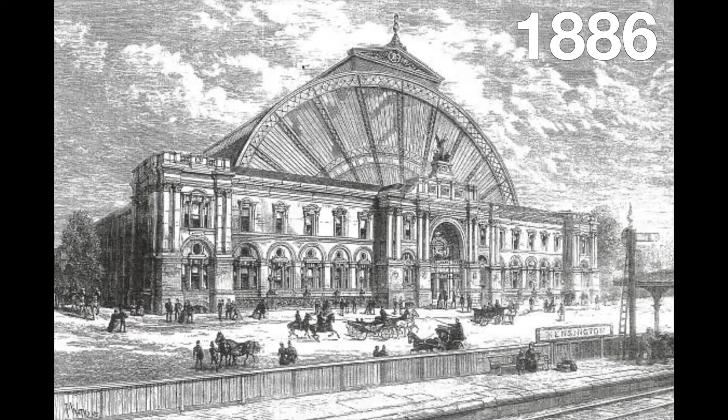We wanted to come up with some words which would really embrace what the master plan was going to be about. The first one was celebrate, and the idea of celebrating is fairly obvious. We wanted to celebrate the wonderful history and also the pedigree of those buildings.

The second word is also quite clear, which is restore. A lot of things have happened over those years. For example, this staircase, which pops in through the Grade 2 star listed facade, was actually put in for the Queen Mother when she came to the Horse of the Year Show. She didn't want to mix with the hoi polloi, so they just cut through an amazing facade and put a staircase in. All of this is coming off, so we're very much restoring the heritage fabric.

The third word here is really where we got involved, and that is the word enhance. Enhance doesn't mean we're going to put gold taps in the bathroom. Enhance is, how do you enhance the experience? How do you encourage people to come to Olympia? Why would they come to Olympia?

And that takes us back to this photograph. When this photograph was taken, and when the Grand Hall was first constructed, in the company registration, in great Victorian words, it was to educate the masses. What happened over time is we have a kilometre of perimeter, but unless you had a ticket to come into the halls, then effectively, why would you come to Olympia? This education of the masses is why it's called a people's palace.

It felt to us, how do we allow people in? So actually they can say on a Sunday afternoon, where should we go this afternoon? Let's go to Olympia. To do that, we need to enhance the offer. How can we bring more into the space? As I say, the exhibition was bold and inventive, and we wanted to ensure that any master plan going forward embraced that.

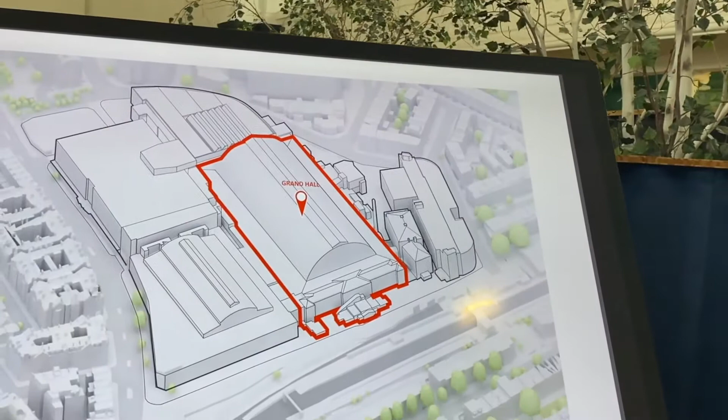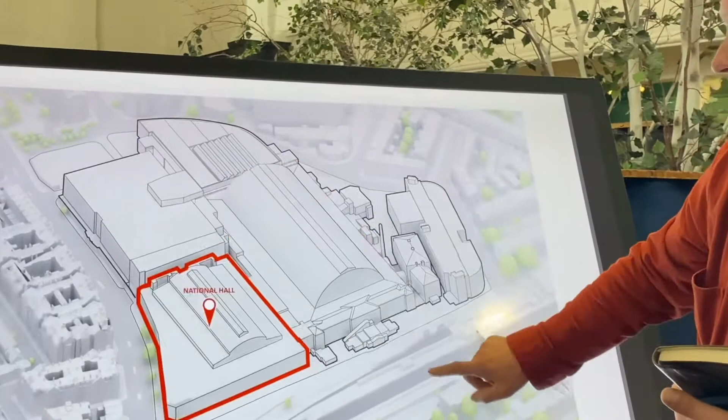Just to whip around the estate, so it's clear which bits we're talking about. The Grand Hall was the first building, the larger building you saw in that photograph, Grade 2 star. We then have the Grade 2 listed building, which is the National Hall.

In fact, this 7 metres across here was the active frontage, so that was an entrance into Pizza Express. If you didn't fancy a pizza, you weren't coming in either. Then we have the Central Hall, Grade 2 listed. We then have the G-Gate site, and actually that was the only empty site.

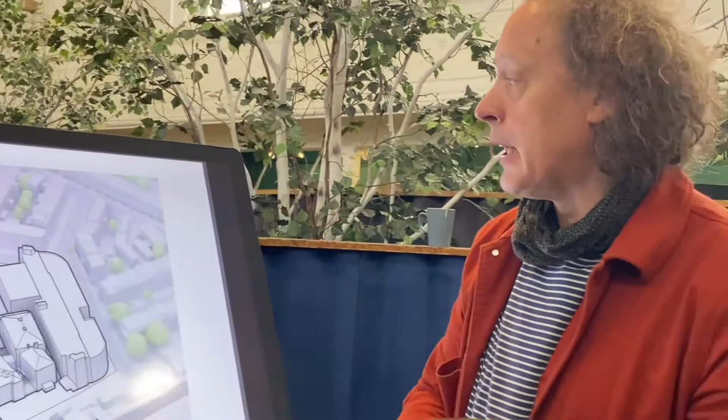When our client bought the site, and they bought the ongoing exhibition business, which is why it's so important to keep the exhibitions going. I guess you would look at this and think, actually, that's the opportunity. Everything else is kind of built upon. It's not quite where we were, but effectively that was the development opportunity on the G-Gate site, previously used for logistics.

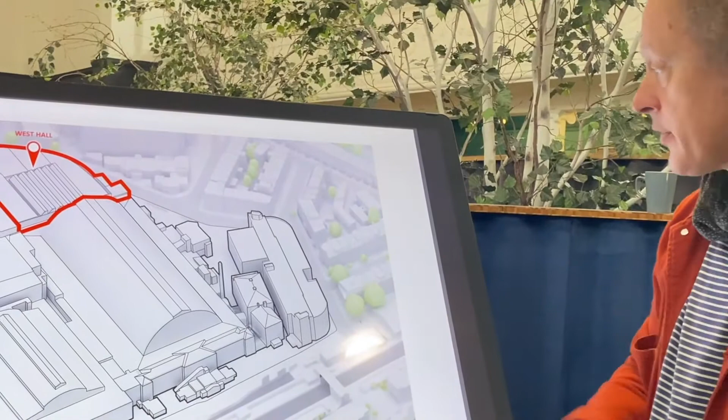We then have the West Hall, which was the original stable blocks for the building. The horses used to go in there, and then people used to come into the exhibitions. And actually, a wonderful piece of legacy during the Horse of the Year Show - that's where they go again. They all get stabled up in there.

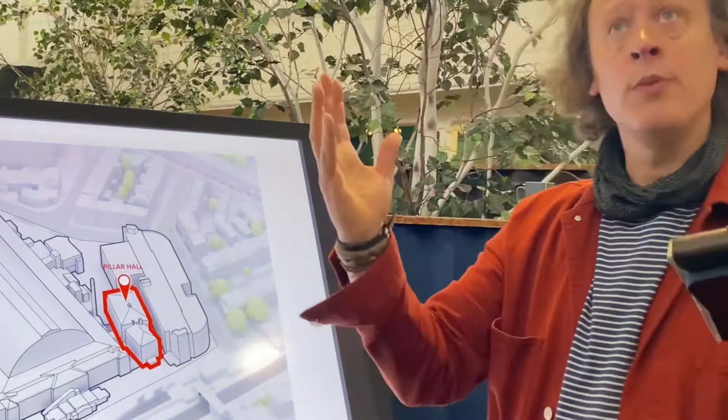We then have the Pillar Hall, again Grade 2 star, ante-room to the Grand Hall. That's what we're standing in this morning. And then we have the 1937 building, which is the old multi-storey car park building, now renamed Emberton House after Joseph Emberton, who was the original architect for both the MSCP building and also for the central building.

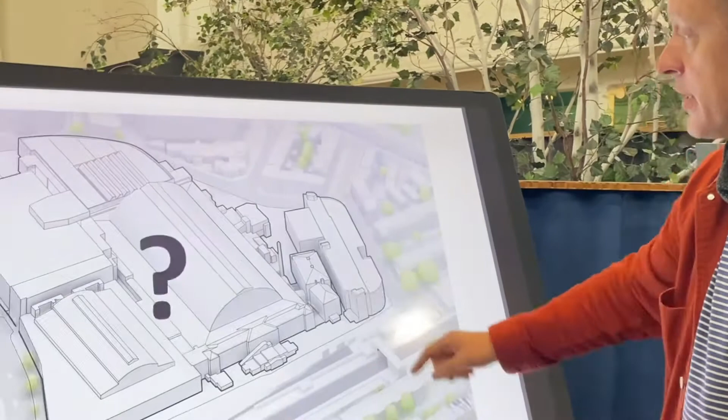So then we start thinking about the master plan vision. Our client was very kind, in as much as they said to us, what would you do? So rather than it being a very definitive brief, the brief was two things. The first one was, you have to keep the exhibition business live - whatever you do, we need to keep the exhibition going during the construction process. And the second one was, how do we optimize the site? How do we bring back that people's palace?

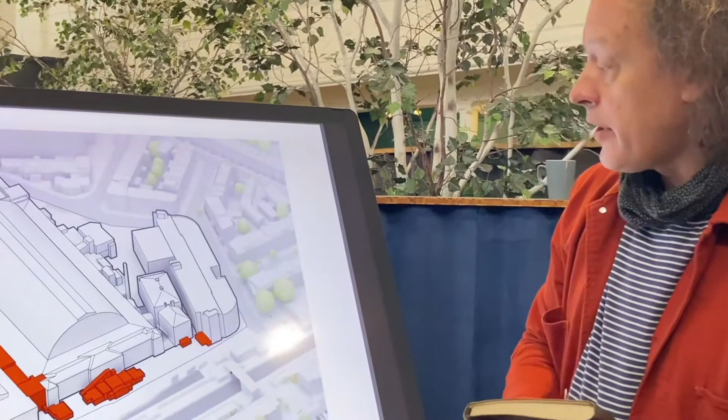How do we get people to come back to Olympia? The first thing we thought about was to sort out the logistics, sort out this linking together of all these things which have happened.

So there used to be a street through here. This used to be Hospital Avenue. You used to be able to walk through it. This is the entrance which we saw on the front of the building.

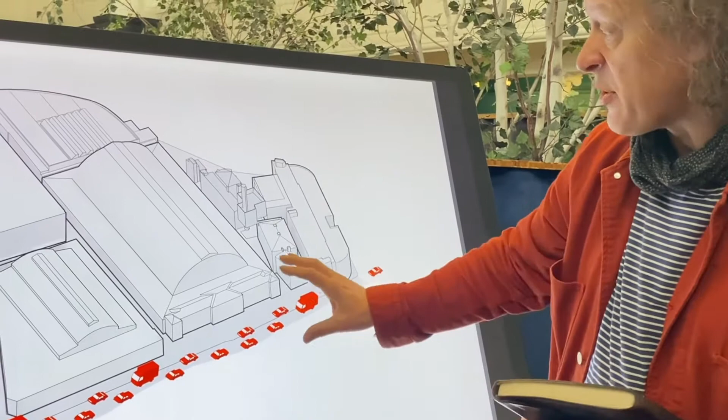Between the two studios, we quite clearly thought, let's get rid of all the freight happening along Olympia Way. If we move that into a better place, effectively inside the halls, creating this new logistics centre underneath the buildings, then effectively we've liberated the streets.

So we start high-fiving each other. We've now done it. We've unlocked Olympia. We've created this new porosity, this new permeability through the site.

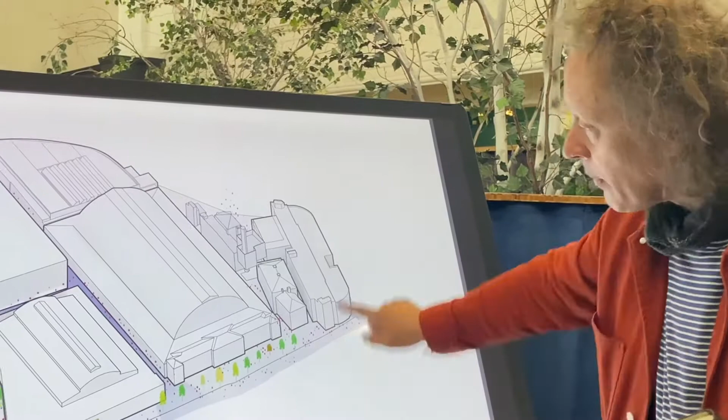Happy days. We then went to see the exhibition business and they said, love the idea, but what you've effectively done is given us 3 halls, where actually what we really need is that continuity. On some shows, they use all the halls linked together. But we still thought the idea was right.

So we came up with the idea that actually, we'll just lift it. We'll just lift everything up. That's what was there previously.

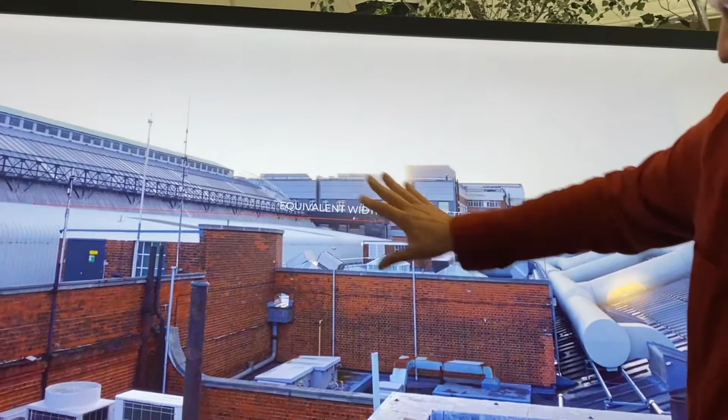When we go out today, you'll see that some of it's still recognizable, but a lot of this is now gone. Just to give this a scale, that's the equivalent size to Regent Street. That's 22 metres wide.

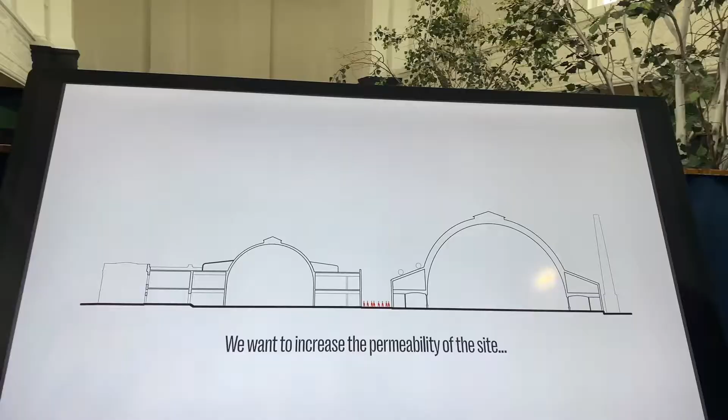So the idea being that actually if we can liberate this, we can bring the public realm up, then we can start to create a space. The idea is to create really the destination, to give permeability to Olympia, to basically allow the public in. And how do we do it?

The beauty was to create this level 2 platform that will give you completely new views to the halls, bring you really close to these amazing barrel vaulted glazed roofs. But obviously, because of the weather and all the conditions, we wanted to have it really comfortable.

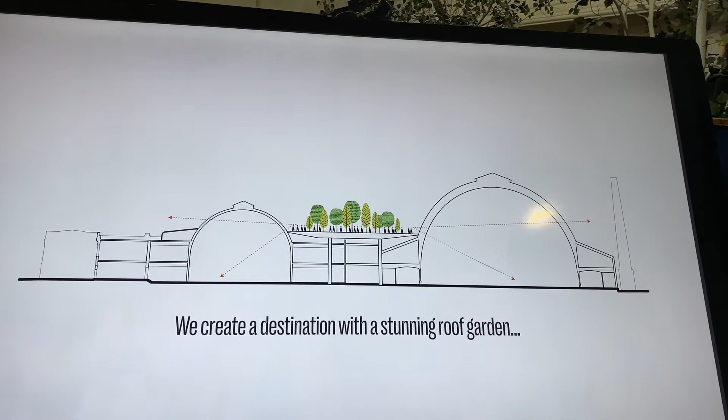So we created a green area with food and beverage. It will take you through. So it's a destination where people can meet, can have food, can have a drink at all hours. There are 2 lines of restaurants, food and beverage with a mezzanine.

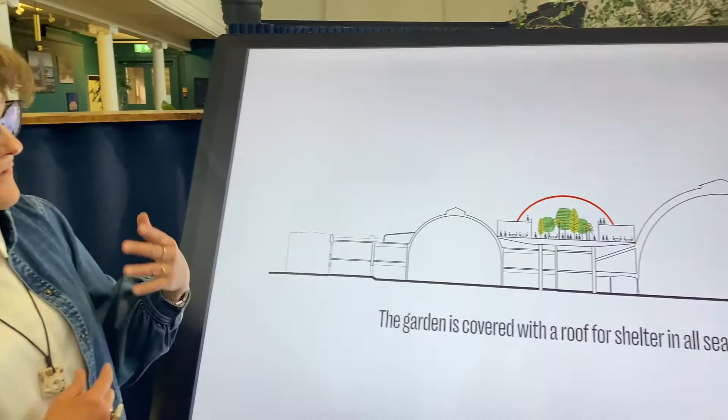And then we covered it with a vault, making a direct reference to the historical halls' roof. It is a vaulted arched glass roof as well. In discussion with the planners, we had to adjust the height, it had to dialogue, it couldn't be super important. We really liked calling it the third arch, this beautiful canopy on level 2.

Talking for the studio, the idea of placemaking and tactile material, it's the human centered vision that really matters. So we looked at every type of 3-dimensionality to give the depth.

So we kept the zigzag in the vault. We really looked into every detail and refinement for the handrails, for the pavers. Everything is really looked at in its detail, because it's how you experience the space.

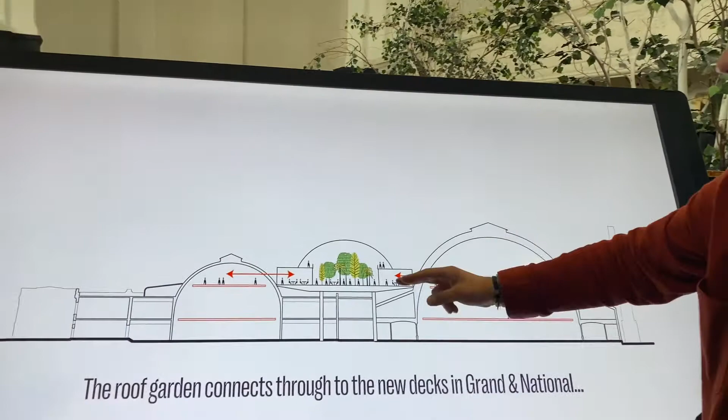And actually you may decide that you want to go to the Ideal Home exhibition that day. So you've come up here for a fantastic cup of coffee, but then your day continues into other events, the other purpose, the other reason to come to Olympia.

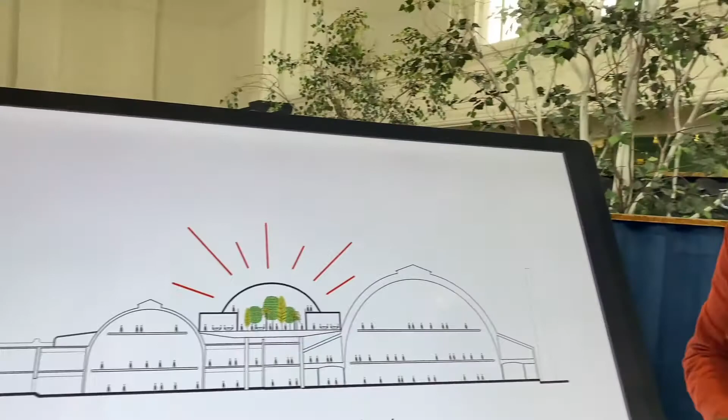And equally it's a place for the offices hovering on top, for the residents, for people who just want to enjoy staying outdoors - now there is a reason to go to Olympia. And then you might decide if you want to go to the exhibition, but it's a far broader audience.

The idea is how you bring people up two floors. Obviously, we need a very long escalator, but we wanted it to also be a stairway. So it was really interesting, the journey as a landscape project as well, how to make people walk up the stairs, with planters, with seating.

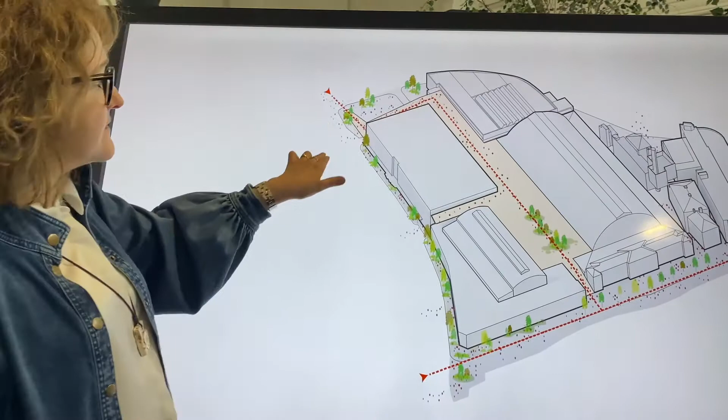So we are encouraging a massive amount of people to just come up, and then the journey continues under the central area, and comes down around to the theatre. That's the important thing, but you don't have to come in and then come back out again. It is a connected route, it gives you lots of options.

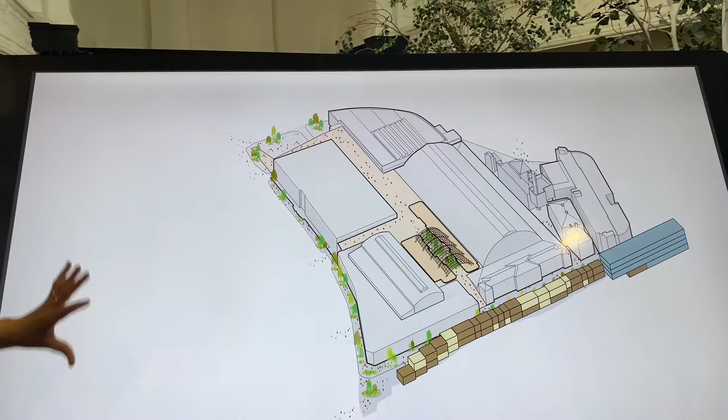Here is a food hall, but you have other facilities along here. So that's the new roof, but the public realm actually continues and links both sides. So it was a massive approach and improvement to the site, because it's a new realm. It's unlocked something which had previously been about just the ground plane.

Now what we're doing is elevating the ground plane, but also giving it purpose here. So once we've got people through, what are those functions? We just talked about the F&B spaces through here. We then looked at the cultural aspects of Olympia, which is a hugely important part of its history, and a very important part of its future.

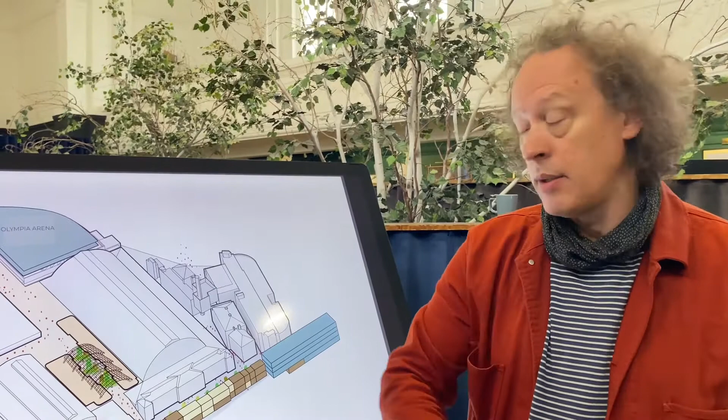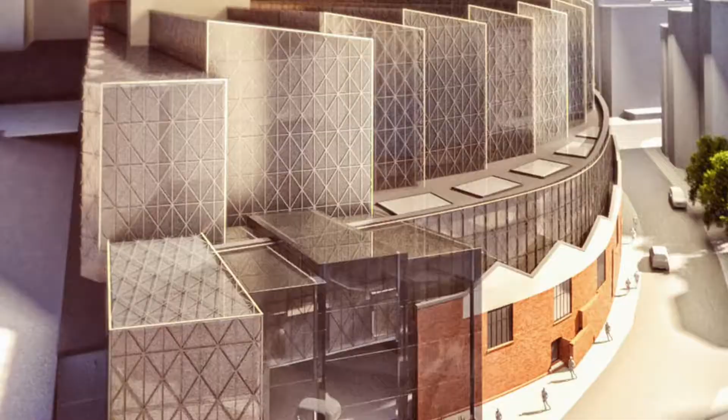So we're constructing two new venues. The first one is on the other side of that wall here, on top of the old West Hall, which is a new music venue. AEG are taking that at a capacity of 4,500 people.

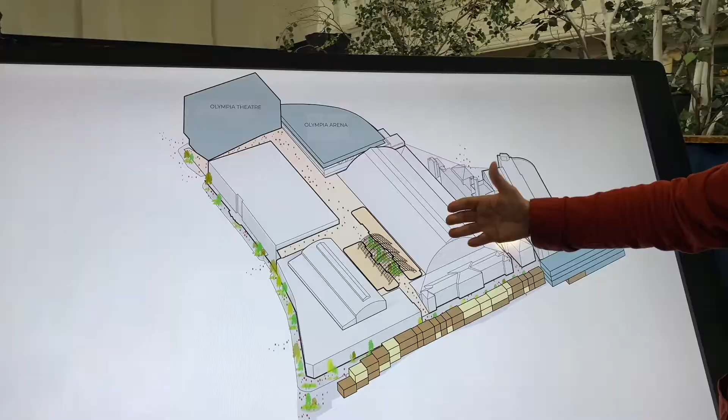Then over here, there's a new theatre, the Olympia Theatre, which Trafalgar Entertainment Group are taking. It's the largest purpose-built theatre since the National, so a fantastic aspect for the scheme. The idea being the entrances are up at this level, so you come through here and then arrive into the arena or into the theatre.

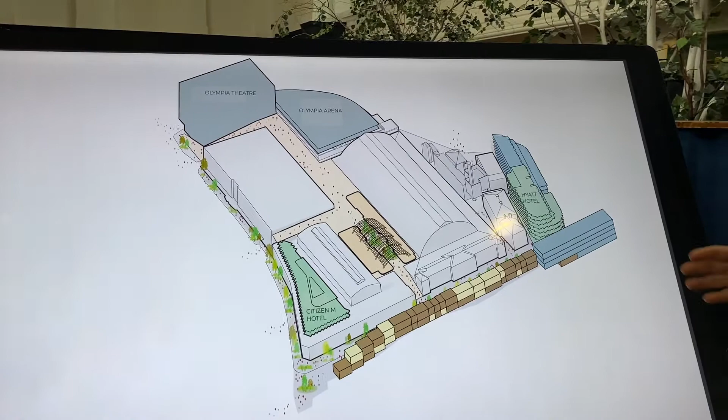We then have two new hotels. One thing which came through the consultation, both with local residents and with the exhibitors themselves, was the lack of hotels in the area. So we have two hotels.

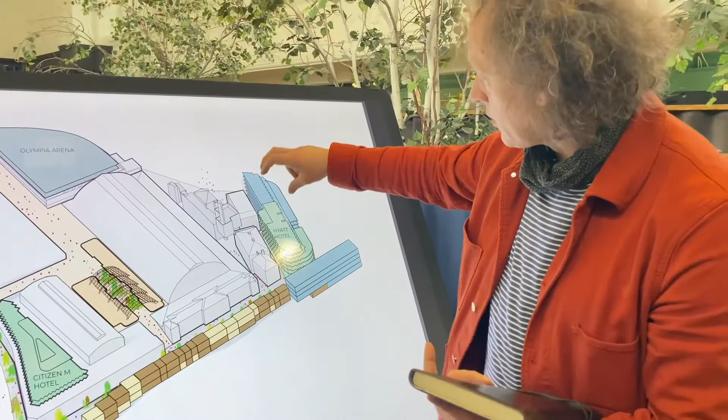We have a Citizen M hotel, an urban hotel going on top of the Grade 2 building on the National Hall. And then the old car park building is being repurposed for two uses: one for a 5-star hotel for Hyatt Regency, and also an education building for the performing arts going into the western portion.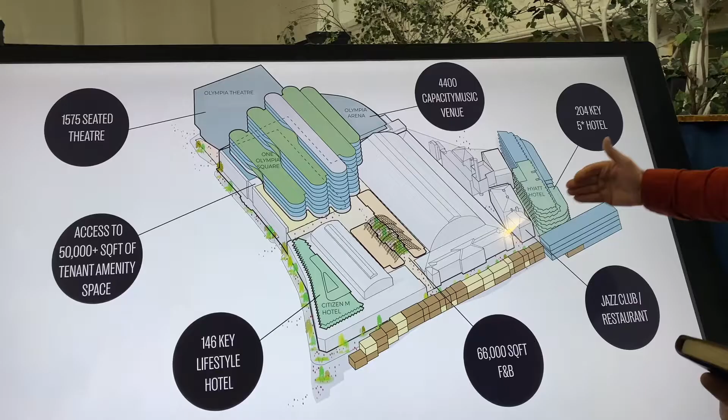And then to bring it all together, we have One Olympia Square, a 600,000 square foot commercial space. But that commercial space is very much looking at how it works with the overall Olympia district, very much looking at arts and innovation, and effectively creating this place. If you're working inside the commercial building, you have all these facilities absolutely on the doorstep.

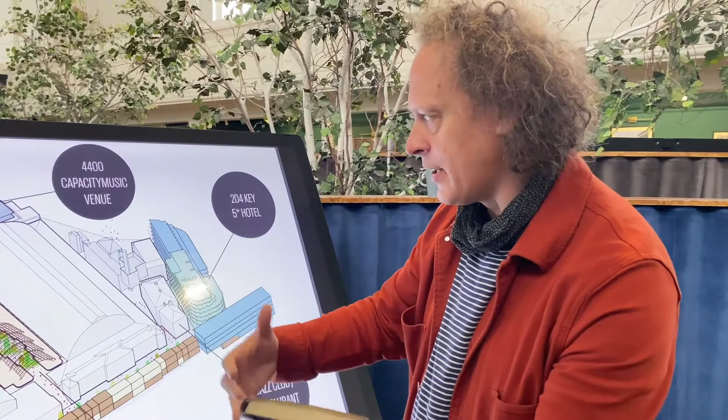As we know, the workplace is a very different place than it was 5 years ago, never mind 2 years ago. So it's about thinking about the future of workplace and how that connects into a wider vision of a place.

The big challenge was to have a 12-story, 60,000 square meter office space that was actually on top. So the idea was for the facade to have the same corrugation and zigzags, the same language with the holes, and to break down the mass by doing this stepped, long fingers kind of massing, to create an extensive number of terraces promoting well-being for people who will work there - some partially open to the public, others actually for the offices - to really break down the mass and allow for extra green roofs.

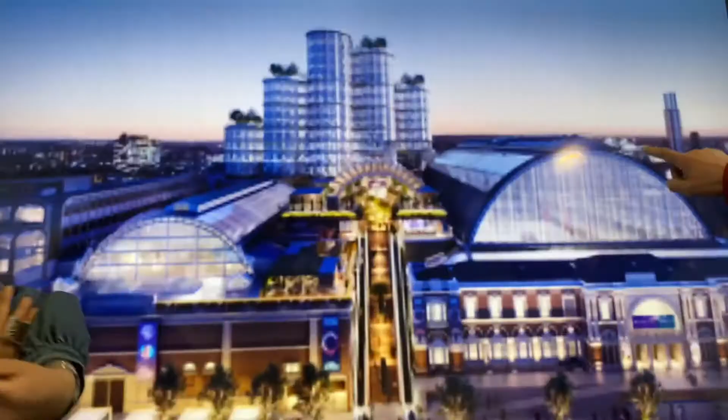One thing that's really interesting when you walk across here, the public ground, is the detail we put into the soffit, because that is a whole new experience - how you walk underneath the central area and how close you get to the soffit is also extremely interesting. So that's the glow, that's kind of the jewel on the crown.

I think the architectural typology is quite clear now, but we were hugely intrigued and delighted actually by the glazing.

It's kind of pleated glass on the ground wall, and you can see that DNA is wrapped into pretty much all of the buildings. Again, it certainly isn't a pastiche of this building, but it's an influence to ensure that when you read Olympia from afar, you recognise it as a single place. And it gives richness, gives depth. It's also a sign of respect for the heritage and the uniqueness of the halls.

So it was really important to be subtle and to really understand how you want to dialogue. So also the markers, we chose the double-story marker to dialogue with the scale, break down the scale, and not be too competitive by having a single marker. I think it's quite successful, and you can see it blends in really well with the rest of that east-west movement of the halls.

Yes, it's very much concentrated on this idea of the five fingers of the main building. But you very much see this continuation, these hovering elements which are completely informed through the heritage. As this photograph shows, if I go back into the daylight view and then into the evening view, again that's the other purpose of the scheme.

It now brings more of an evening economy, a nighttime economy into Olympia, which hadn't previously been there. People were coming to the exhibitions and leaving at 5 o'clock. You can now come to an exhibition, have dinner, go and see a show. It's also opened up to the local community, and the local community benefits here, Louise will talk about this at length. There's really strong support from the local community in terms of what we're trying to achieve in the scheme.

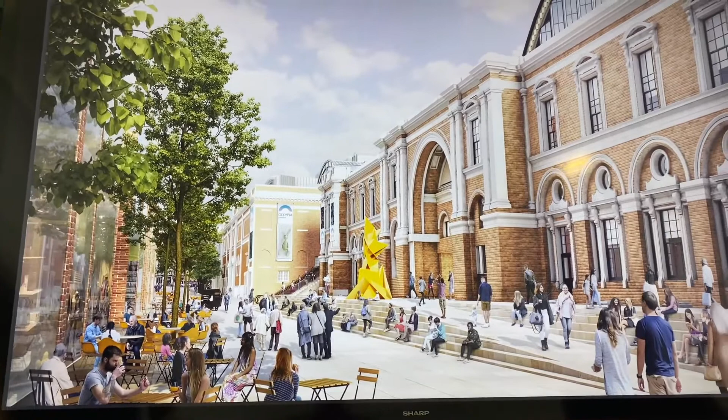During the consultation process, and then we drop down onto Olympia Way. So there are two aspects to Olympia Way. The first one is the landscaping, sorting out the level differences into the halls. I think, Consuelo, you're just about to talk about the escalator route through.

Yeah, this was the entrance that I mentioned, to bring people in—you have to invite people into what you were just saying. It's really important to use the language of the grading here to allow seating, to allow informal meetings. That was part of the journey, to break up the long journey and to create a stairway that is inviting.

You'll really get a sense of this when we go out onto the site about the space between the two halls. Originally there was a 1950s infill building through here, but now we're giving that kind of legibility back to both of the buildings. There's real clarity about the heritage buildings now.

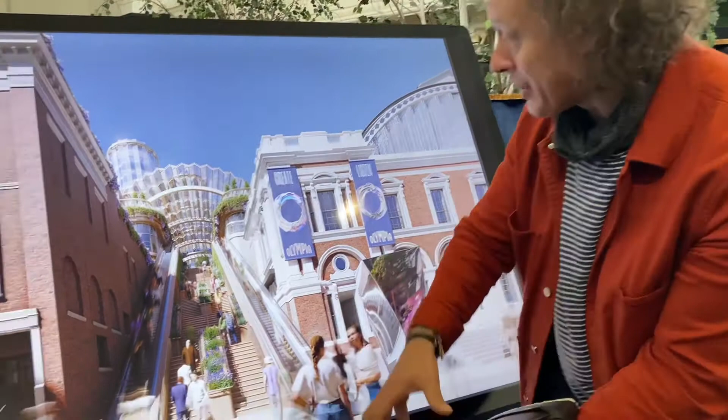You can see effectively this is where the street used to be, so what we've now done is elevate that street up and above. In terms of the historic plan form, it's still very recognisable in the master plan. And that's the first part under the canopy with the mezzanine, and underneath there's the offer.

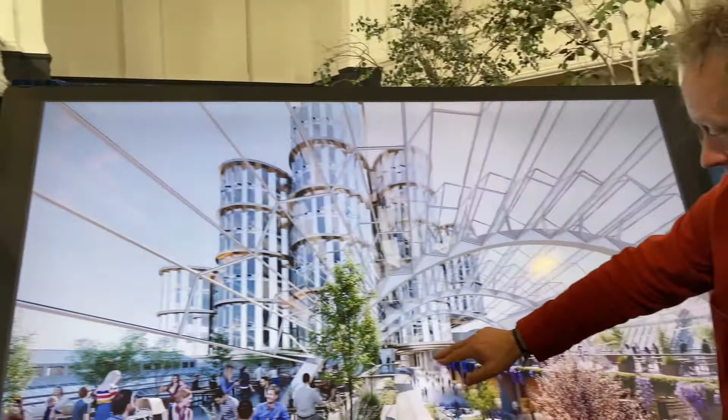Again, materiality is all about being very tactile, utilizing the green aspects as part of the architecture. So it is a very pleasant experience. Here we're just seeing the entrances into the music venue here and into the theatre here. So it really makes it a very experiential space.

And then through here, the main entrances into the commercial workspace are down here as well. So it brings everything together. There's a real purpose to this public realm—2.5 acres of new public realm has been created as part of the scheme.

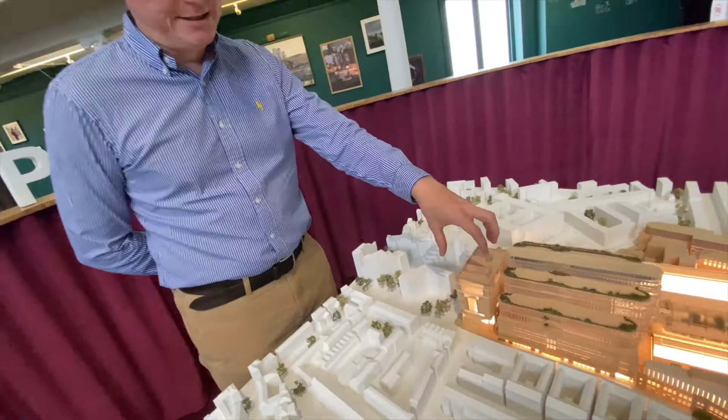And then we close the document with the vision for 2024. This G-Gate theatre building became quite a key strategic point for construction, because we've chosen this to be the main logistics access for construction.

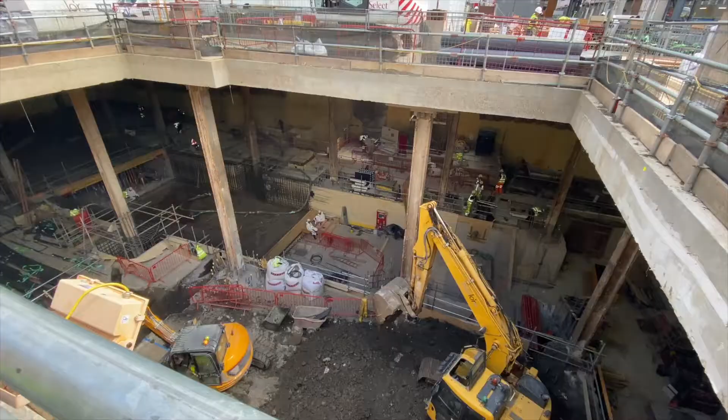But there's a very deep basement beneath G-Gate and all of the central building here. So there's a top-down construction method underway at the moment that permits all the construction traffic to come in at ground level, while underground there's construction occurring at the same time.

Just coming around the site, the music venue is the west building over here, and the music venue sits atop the exhibition space underneath.

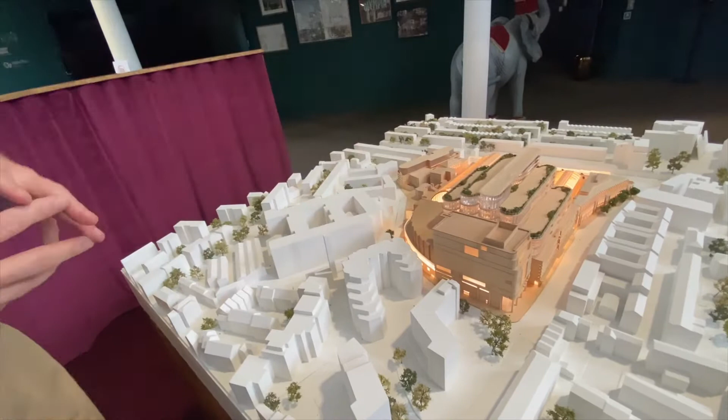So this is being constructed in 2 phases. During COVID, we had quite a bit of access to the exhibition space while exhibitions weren't running, and we constructed the new music venue floor over the top of the exhibition space, designed for dynamic crowd dancing loads and to acoustically separate the exhibition space from the music venue, allowing them both to operate events at the same time. That was quite a structural engineering challenge to design for the dynamic case it needs to support, and also from a construction point of view to get it quickly constructed and hand back the exhibition space.

That exhibition space is now back in Olympia's hands and is running exhibition events again while the music venue is being constructed on top. Coming around to the Grand Hall, this is a beautiful Victorian structure, wrought iron, trussed, barrel vaulted arches landing onto cast iron columns, very decorated and beautiful. And then we've got this new beautiful office building over the top.

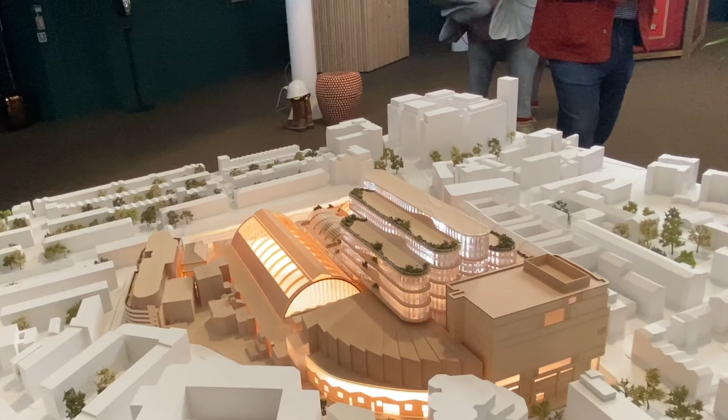There's a very careful relationship between that office building and the heritage structures, where we worked very closely with the architects to try to minimise any intervention between the new permanent structure and the existing structures. Where there needed to be any columns coming through, we've tried to harmonise that with the existing Victorian structures.

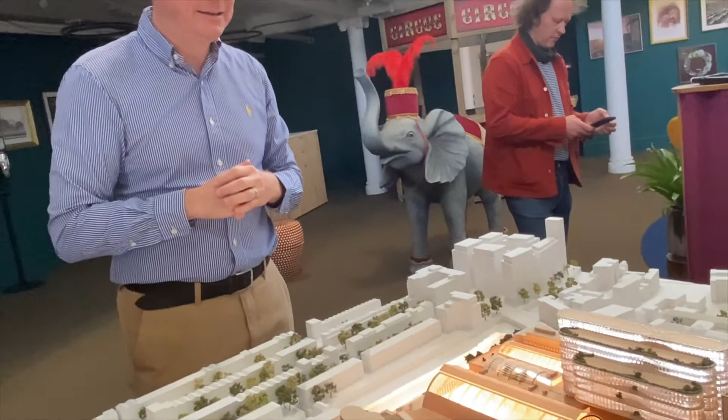That was really important when we did the concept with Heatherwick and SPPARC on the public realm here. There was an initial vision that had a number of columns. When we got involved in 2020, we quickly worked with the architect to establish a different approach which could remove about 40% of the columns going into the historic structure, essentially by supporting that public realm on grids of 2 columns and having a large cantilevered structure.

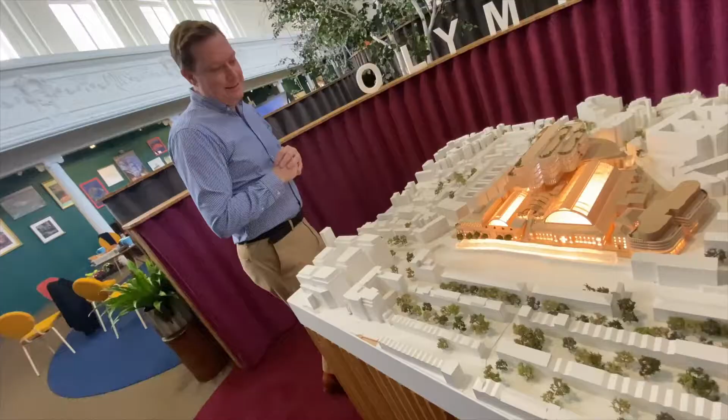Then just coming around to National Building, this is where the new citizenM Hotel sits atop the Grade 2 listed Victorian national structure built around 1920. The design of this is interesting because this new hotel structure essentially carefully pierces through the existing structure and largely works independently as a structure.

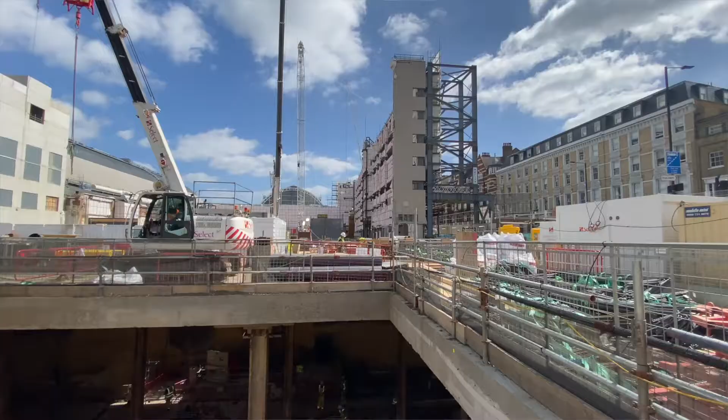And then back to the biggest component of the site, the central building here has a retained Grade 2 listed facade on the original Empire building, the central building. I guess the interesting part of this is we've accelerated construction by making parts of this site top down. Some parts are conventional bottom up, in a hybrid way that optimizes the construction rate.

In the design, these fingers of the office building have to cantilever over the historic structures, so they have a suspension system at the end of each finger of office building to hang cantilevers of up to 12 metres.

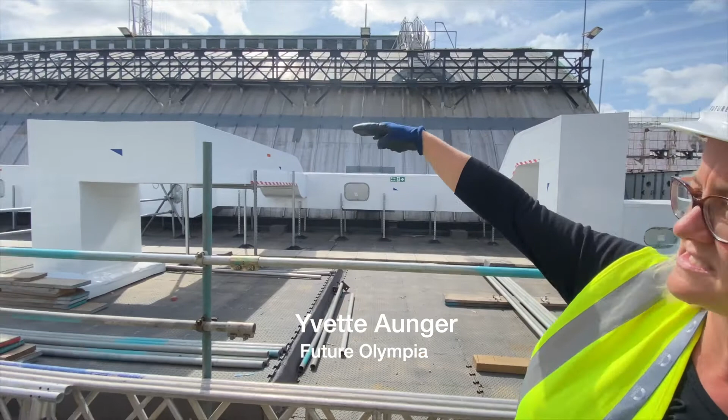The new walkway for the public realm is probably about a metre above the top of this white ductwork you can see at the moment, just to give you a feel for the spaces. Coming across the site, at the far side you can see the G-Gate site. That's the most progressed of the basements, and actually the top-down slab is partially constructed. There's excavation happening underneath that zone, and we'll have continuous logistics access into the site from there.

Into the project, almost 100,000 cubic metres of excavated material, including basement and piles and things like that. 50,000 square of new facade, more than that in fact, going across all the different buildings. Steelwork is about 16,000 tonnes in total. The biggest piles are 60 metres deep, 2.5 metres diameter. Logistically for cranes, we'll have 14 cranes over the course of the project, with about 10 or 11 on site at any one time. So yes, an awful lot going on.

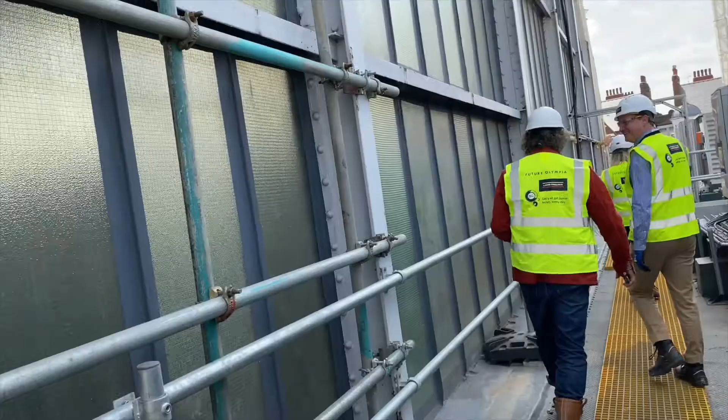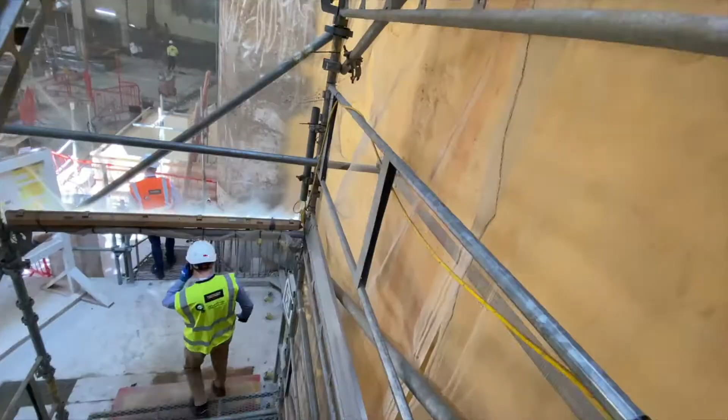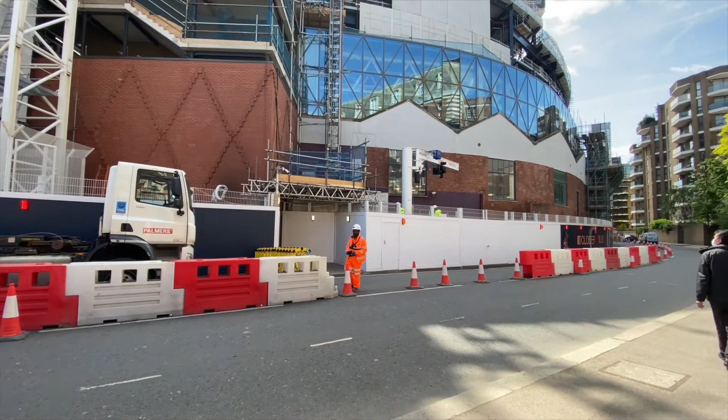Excellent. So we're now standing outside the West Hall, a building in 2 halves, literally. The ground floor and the first floor are exhibition space. This formed part of phase 1, so we've actually handed this back to the exhibition business and are now occupying and using these 2 levels. Above, we're then looking at the music venue, which occupies the 2 floors with a large double height volume as the main auditoria internally.